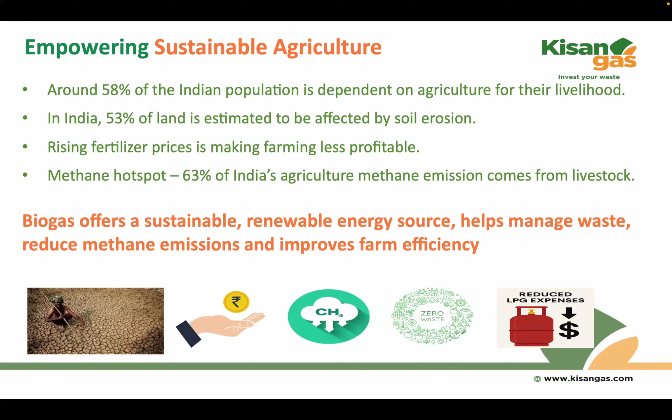As we all know, rising fertilizer prices along with low prices of farm output make farming very unsustainable for families. And from methane hotspot emissions, 63% of India's agricultural methane emissions actually comes from livestock. So biogas offers a very solid, sustainable, renewable energy source, which helps you to manage your waste, reduce methane emissions, and also improves farm efficiency. Now, this in itself is a good package which comes with a lot of government support and NGO support, right? So, just in brief, what we do and what kind of support it comes with.

So, we are Kisan Gas. We deploy decentralized farmer biogas systems across the country, and we do it in association with strategic partners like NGOs and FPOs who help mobilize farmers. We have solid support from Sustain Plus Energy Foundation, which is a group of Tata trusts, and they are our CSR or funding partner. And with their help, we are able to give a single biogas unit, which normally would cost 35,000 rupees, for approximately 14,000 to each farmer. So these are the projects that we mobilize and deploy.

Basics of biogas. For those who don't understand what biogas is, basically when any organic waste decomposes, it generates methane. So biogas is basically a natural gas which is produced when organic materials break down without oxygen. This gas contains a large component of methane, carbon dioxide, and trace elements of H2S and other gases. Methane is what actually makes the biogas useful for cooking and heating purposes.

The basic flow of a biogas process is simple, in 4 steps. You have to mix the cow dung or organic waste with water, dilute it, and put it in the digestion tank where microorganisms break down the cow dung or waste in the absence of oxygen. From this process, methane is generated, and we can collect this methane and channelize it to either the kitchen or some other purposes. And we can also collect the slurry output, which is the leftover liquid which comes out as a fertilizer or manure.

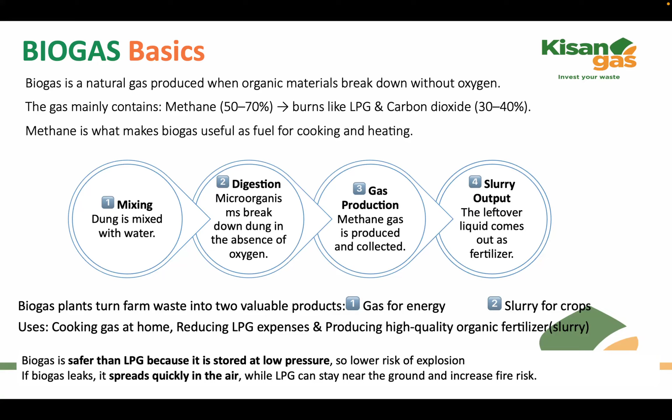Some people always ask how LPG and biogas are different. Biogas is very safe as compared to LPG. Primarily, it spreads quickly in the air if it's leaked, so it doesn't retain. Also, unlike LPG, it does not form or stay on the ground, so explosion or fire safety is very high as compared to LPG.

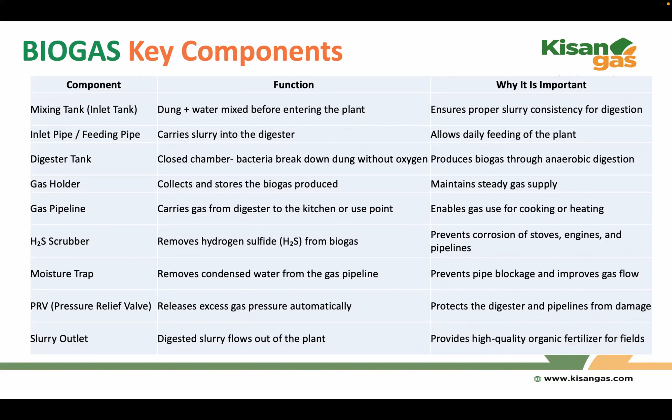Now, what are the basic components of a biogas system? As we mentioned, you have an inlet, then a digester tank, and a gas holding tank, along with a pipeline which sends the gas after scrubbing it for H2S, which gives you a rotten egg smell. So an H2S scrubber; then sometimes the gas also has moisture, so a moisture trap is one of the key elements. And you also have a pressure relief valve, which helps you to safely pass on the excess gas. And as the slurry is collected, there's a slurry outlet bag also.

Now, biogas is a digestive system, something similar to our stomach, right? Like the digestive process that converts our food into energy in our stomach and intestines. Ideal working temperature conditions are 30 to 37 degrees. These are ideal, but it will always work and give you results for any temperature above 15 degrees also.

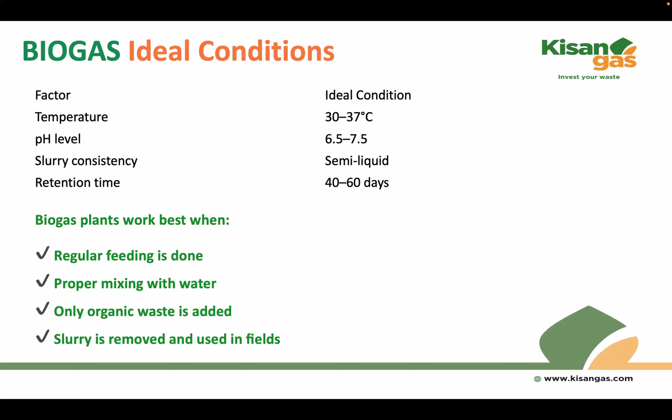It requires normal pH levels of 6.5 to 7.5. And the slurry which we need to input has to be in semi-liquid form. And it would take roughly 40 to 60 days to process. And it would work best when you regularly feed it with properly mixed diluted slurry or cow dung and waste, and only organic waste needs to be added to it, and slurry has to be removed from the system and used appropriately. This is when you'll get the best output of your biogas.

Right? So even a large family of 5 to 6 people with 5 cattle can easily save 100% expenses on LPG and firewood. So if you're using one gas cylinder a month and you're buying it roughly at 900 rupees or 1000 rupees, you're bound to save almost 12,000 rupees if you have 5 cattle using the biogas alone. There are additional savings: you can reduce fertilizer expenses by using slurry. So the minimum you can save is 22,500 rupees if you have 5 cattle and you are using this biogas on a day-to-day basis.

Now, people generally would have questions about what other input materials can be used in the biogas. Definitely, we can use cow dung, buffalo dung, some poultry litter, pig manure, kitchen waste, vegetable waste. But there are ways and means how to use it. So for kitchen waste, just like we chew our food, we need to actually chop it down before we feed it into the biogas system. So ideally, you need to speak to the biogas provider before making additional uses of input material, so that nothing goes wrong with the system.

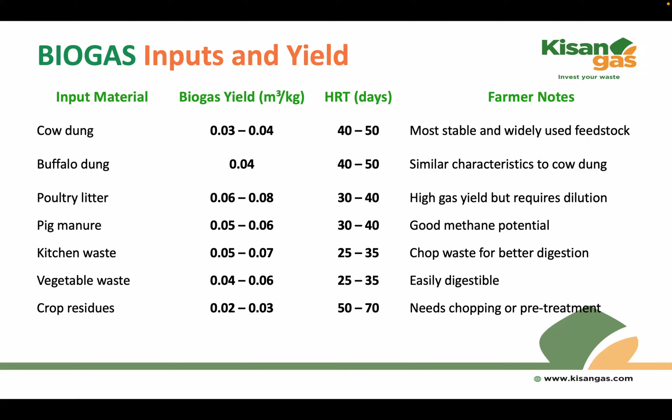Now, coming to the major topic of it, how does biogas help soil and how would it help me increase my output if I'm a farmer? Now, biogas slurry is gold in its actual terms, right? It's a nutrient-rich organic fertilizer which provides nitrogen, phosphorus, potassium, along with micronutrients and beneficial microbes. It can be used at various stages, right from soil preparation to seed or root treatment. It's used as a crop fertilizer, as a natural pest control mechanism. And also after all of this is done, you can definitely make much better compost using your biogas slurry.

Of course, there are caveats. As we all know, we don't apply cow dung directly to leaves or plants. So biogas slurry similarly has to be used only in diluted form. It has to be applied properly to the soil, and usage has to be stopped at least 3 weeks before harvest to avoid any kind of contamination. Also, we must maintain basic hygiene for using slurry. And again, before you make specific uses, please speak to the operator or the service provider.

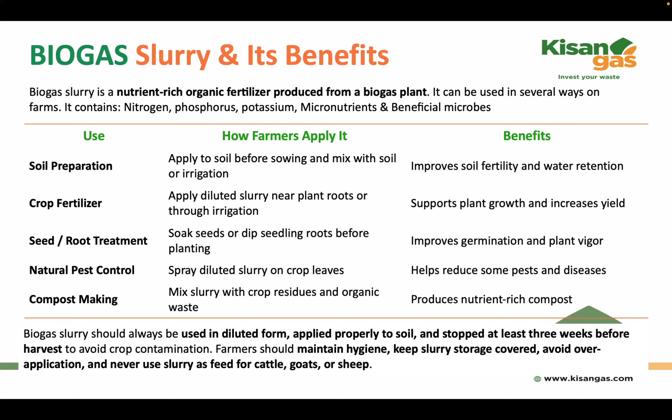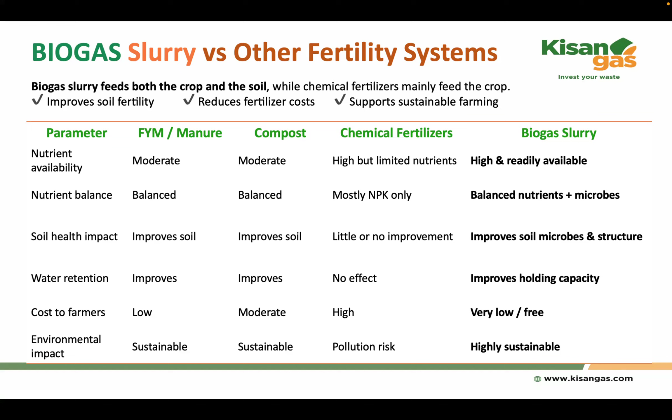It gives balanced nutrition along with microbes and micronutrients, and it impacts soil health with the help of these microbes, and it improves the soil structure, which also increases the soil's water holding capacity. So you have better moisture for the soil, thereby better nutrition to the roots and plants. And again, when we consider the climate and environment impact, it's a highly sustainable technology. Just look at how much you can save if you have a family household gas, right?

Per acre productivity, if you're growing vegetables, you're saving as good as 5,000 to 6,000 rupees per acre, because you're spending almost 10,000 rupees an acre for growing vegetables, whereas with biogas slurry, you just have to spend around 3,500. Similarly, if you're growing sugarcane or cotton, you would be saving anything between 5,000 to 7,000 rupees per acre. In addition to this, you are saving LPG costs and definitely reducing your fertilizer purchases.

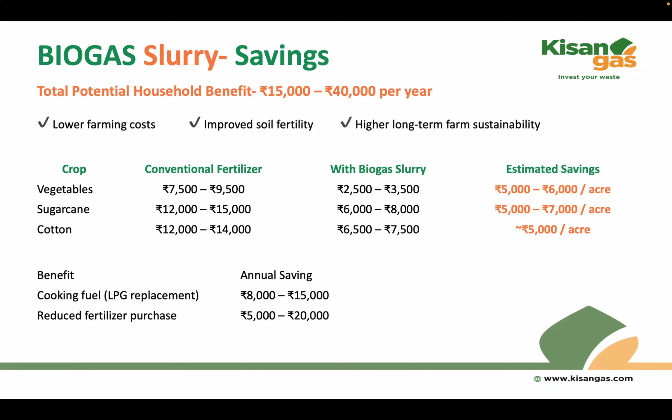So net, it can help save a family anywhere between 15,000 to 40,000 rupees per year, which is a substantial component of a farmer household's income. So in short, this is a complete circular nutrient cycle of a biogas farm.

The cow dung is used to provide you cooking energy, which is basically the gas for the kitchen, right? It also gives a slurry which can be used as organic fertilizer, which enriches your soil and provides you healthy crops. It can also be used to give you sustainable farming.

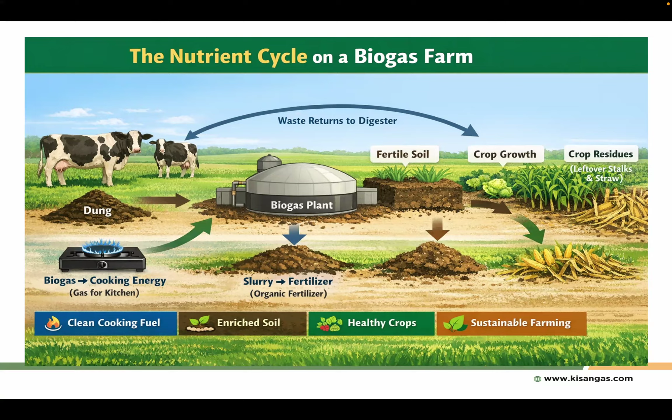A couple of stories from our installations. We have Mr. Dattatray Guge, who has almost brought down his fertilizer procurement to just 10 to 20% by using biogas slurry. And also Mr. Govind Dhakne, who's brought it down to just 5%. Initially he was using 100% chemical fertilizers. Now he barely uses 5% of it as compared to earlier. All of this is made possible by making 100% benefit of the slurry that is provided to him by the subsidized biogas.

Now, coming to a little bit about our product and model, you must have seen multiple types of biogas plants, some which are under the ground, some which are plastic tanks, some primarily concrete tanks which are constructed. We make simple PVC grade, high quality material where we are giving you a 10-year digester warranty. This is an above the ground design, which is a very unique proposition. The above the ground design makes it easier to handle and transport. If you want to shift it, you can easily shift it. You just need to remove the slurry, pack it and shift it.

Right? Since it's above the ground, you don't need to excavate any ground, so it can meet all soil conditions. It's a very modular design. And the same kind of ease is translated to use and maintenance. So very easy sludge removal, it needs very little care and gives you very high life and reliability.

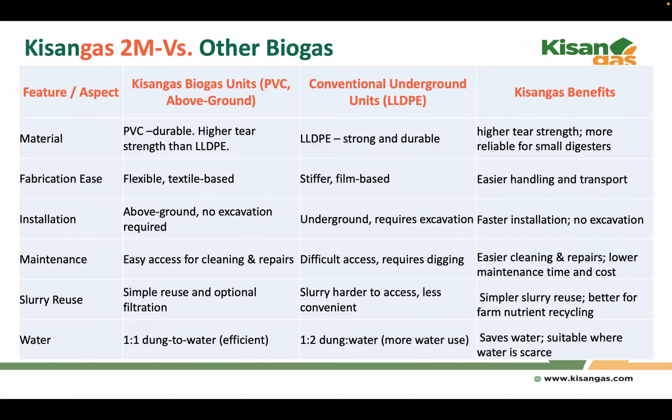A little bit more about our company. We are a part of Cleanergy Tech Solutions. We make waste treatment solutions primarily for biogas and natural gas generation. We are supported by many well-wishers, and we also make slurry systems and the entire systems for large biogas and CBG plants also.

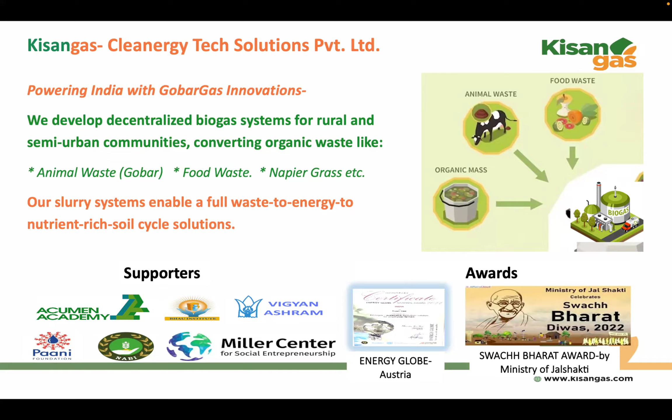Tata Projects is one of our large clients, where we've made them a food waste plant, like for other hotels also, for biogas. This works on food waste, and it replaces almost 63 commercial cylinders a month. We've also made a 25-ton input feed capacity per day Napier grass plant.

Thank you. That's the end of our presentation. If you have any queries or questions, I'll be happy to help.

Okay. Thank you, Mr. Amir, for the presentation. Now I'll take up some questions. Okay. Just 1 second. Yes, ma'am.